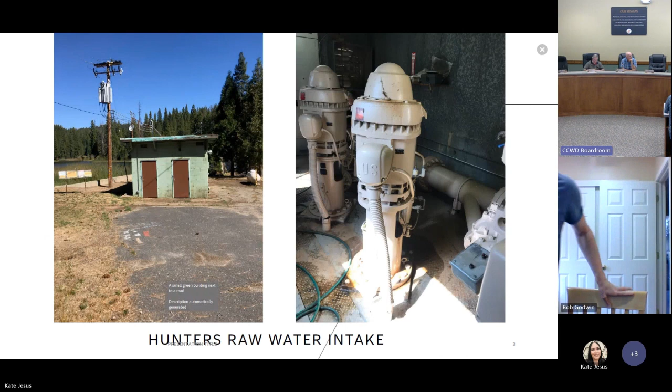So the Hunters raw water - on the left there, that's the old chlorination building. That's going to be the new location of all the electrical and controls currently at the bottom of the dam, so in winter weather conditions and stuff we need to get to them. They'll be right there at the top of the reservoir.

Did they have any trouble with that bear? With the bear - there's a big bear out there that was tearing apart that apple tree. Oh, wow.

And on the right, those are the really old pumps we have at the bottom of the reservoir now, so they're going to be replaced with some modern, larger pumps that can handle it when the water level in the reservoir drops.

We've gone through a bunch of environmental review right now with the Forest Service, so they've been pretty difficult to deal with lately on the RFIs, even though we're not on Forest Service property. But we've been working hard to. There's spotted owls, I guess, in the area now that weren't there a couple of years ago, so we're dealing with that.

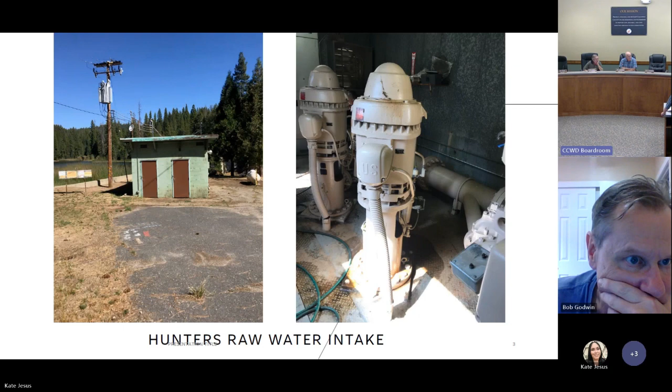Next slide. So this is the Arnold wastewater treatment plant. This plant project's 100% designed right now, which actually was going to go out to bid until the sewer customers in Arnold are now under disadvantaged community. So we got options to apply for SRF grants on that project. We're working on an application right now. HydroScience, our design engineers, is working on a design memo to submit along with environmental documents that are now going to be required as part of the grant application.

What, how will that affect the timing? Well, this is a CIP loan project. Initially, the money came from the first loan that we got a couple years ago. It should take at least 6 months to do the environmental portion of the project. So would it be applying for the loan and grants during that timeframe? Yeah, we're working on it right now. They were supposed to be working on a letter report to us for their increased scope, and they're also working with, I think it's either Helix or Dewberry, on the environmental to try to get them lined out.

Because right now it was going to be pretty much an exempt project because we were going to fund it ourselves, and now we have to go through a full environmental review if we go out and seek a loan or a grant. Yeah, well, this would be 100% grant we're looking for, so it's definitely worthwhile to go after. Worth doing. So basically, the job is to put a second clarifier there and new digesters.

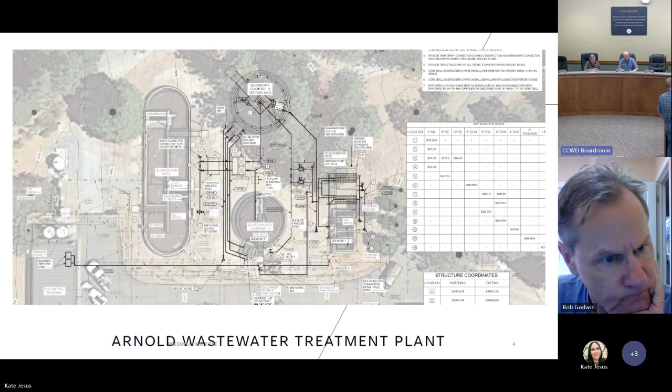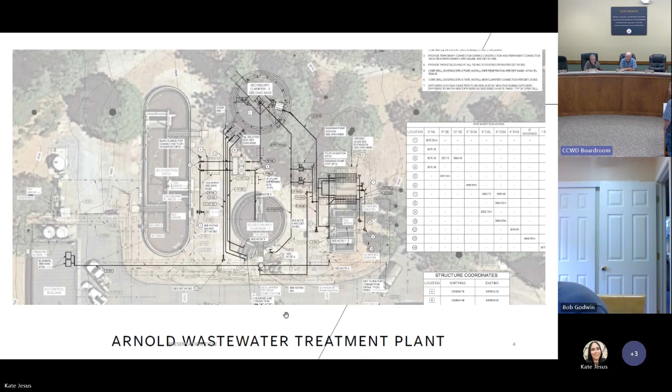Okay, the next one. Yeah, I mean, the grant will slow this down. It has already slowed this down a little bit. Kudos to our operators for being innovative and doing some modifications on their own in the meantime, because we were hoping to have this already out to bid and starting construction in the next construction season. That's probably going to hold it a year. But the possibility of a grant is worth the wait, I think.

Is there any part of this proposed work that's going to affect the tribes? Yes, it potentially could, so we have to notify them.

Jenny Lind Tank A-B transmission pipeline, working on getting the bid documents out this month for that project. So it's a new transmission main, and I think it's 4 PRV stations along the way for the pressure. So, yeah, that's the elevation, that's the profile there.

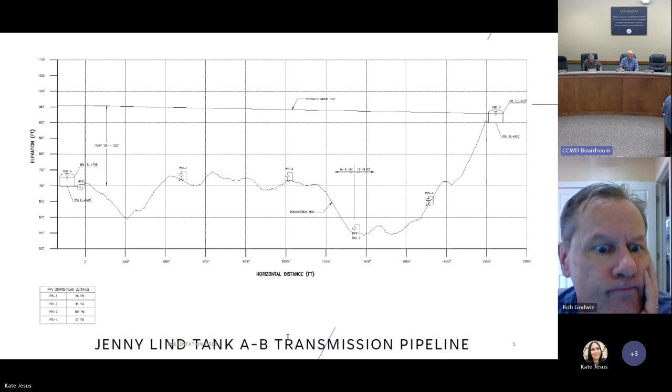Yeah, and next slide. So this is the La Contenta wastewater treatment plant. We got some budget this fiscal year to start doing the design on this project. So we had a meeting between operations and engineering and brought our treatment plant operators into the picture to talk about the project. Bob Godwin, our retired engineer, knew it well, he was very involved in this project during the master plan process, so we brought him in to help us develop the RFP for this project.

He's online if he maybe wants to answer some questions, but basically the project we're looking at is a second BioLac, which is the aeration activated sludge unit. It's that second picture down from the top there. It's an old style BioLac, so it's not as good as the new ones they're coming out with, because the new ones have integrated clarifiers and nutrient removal and a lot of the things we really need at that plant.

So with the project we're looking at, they have a lot of flow equalization problems with Huckleberry. There's a lot of flow that comes in, and they can't take it all at once, especially during the big rainstorms. So if we have a second BioLac unit next to the existing one, we can eventually double the capacity of that plant, and also have redundancy in the meantime until build out. By building 2 of them, you can easily maintain them. There's also some other improvements that have to be made to the effluent disposal there eventually as the capacity increases.

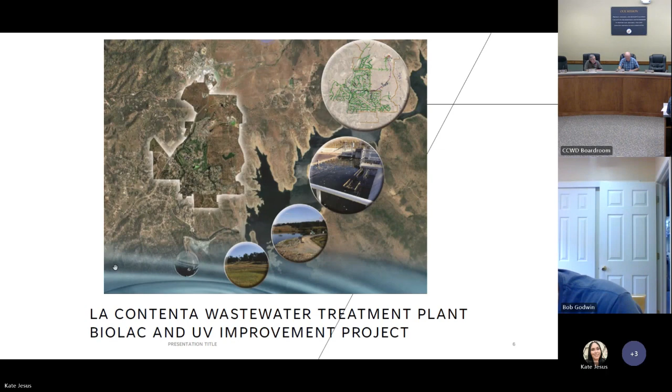Okay, next slide. This is the Jenny Lind water treatment Clearwell number 2. This one's on the CIP for basically repair and repainting.

During the site visits, there's some holes in the top of the roof on the existing Clearwell, and the conditions are at a point where the operators won't even walk on top of it. So the project scope might have to be increased from just paint and repair to a roof replacement.

When we did the original Clearwell, Clearwell number 1, about 10 years ago, they raised the elevation of the Clearwell. These Clearwells float together, so with this new Clearwell we don't have enough freeboard between the rafters and the water level. We really do need to raise the roof, because there's a sloshing effect that can happen during an earthquake and can damage the roof.

It's also a standard in the AWWA design standard that you're supposed to comply with. So we're looking at how much free space they require - you need about 18 inches for this diameter tank, and you've got about 6 right now.

One option we looked at is if you take the rafters out, you can put an aluminum dome like we do on the Redwood tanks replacement project that sits on top of the walls, and you gain the freeboard because you don't have the rafter depth. That's one option. On the other Clearwell that we already rehabbed in the past, we put like an 18-inch circuit, just a piece of new tank wall, and then raised the rafters up.

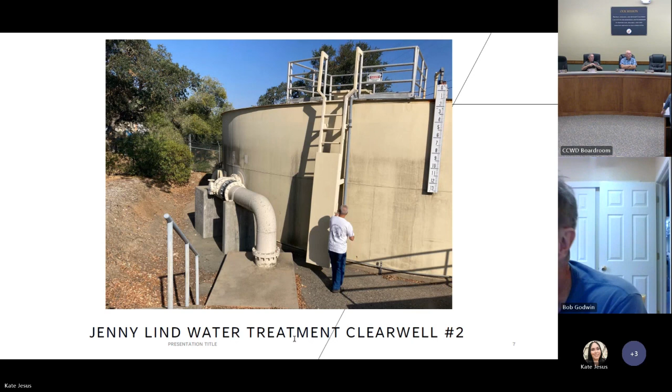So that one, we'll have to talk about the scope here when we get closer to the final design.

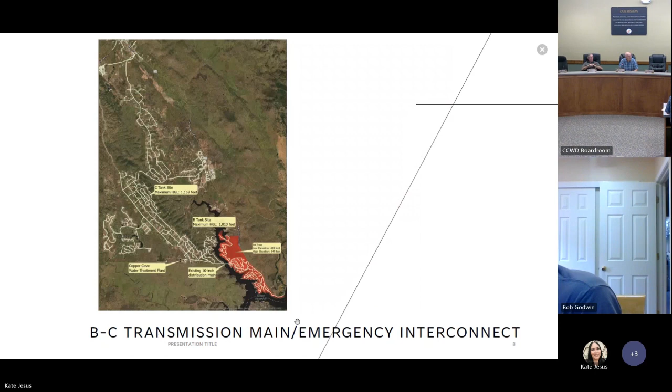Next one is the B-C transmission pipeline. PBI is working on this project, and we just got the 50% design for the transmission main. So the new transmission main is going to follow, it's going to be west of Little John.

Their kind of cross-country line goes down. There's a little section there at Copper Valley, Saddle Creek that was put in originally, so we'll tie into that section. And then there'll be a little section that's already built, and then we go up to the B tank, or C tank, sorry.

So this is going to reverse the flow from right now. We go from the treatment plant up to B tank, and then we pump to C tank. But the C tank elevation is higher than the B tank, so if you reverse the flow, it'll flow by gravity back to B tank.

They're also working on the emergency interconnect. Right now we've got that 10-inch line - I'm not as familiar with this project, but there's a 10-inch line that goes underneath Lake Tulloch there that we don't know the condition of, that supplies all of Poker Flat. So this emergency interconnect would supply water to that area there in red if that line were to fail.

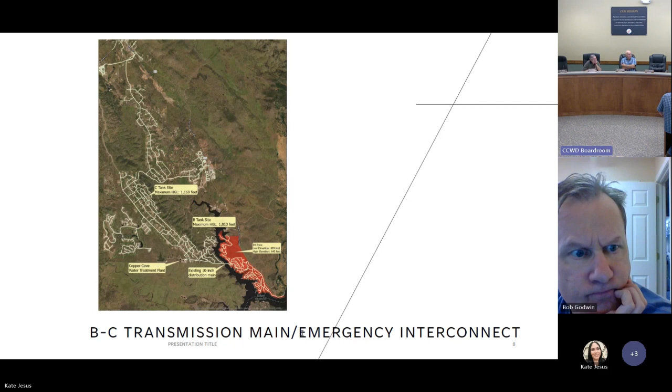Now I'll talk about the ones in construction right now. We've got the West Point, Wilseyville consolidation, West Point water treatment plant, the Copper Cove lift station, AMI, Redwood tanks, Forest Meadows, Copper Cove tanks, and maintenance building - just about done.

This is the West Point, Wilseyville consolidation - that's the sludge drying area, beds. KW Emerson's is working on this project. They've had some struggles with delays and stuff, but it looks like they're still going to be able to meet the deadline that we have with our funding agency. That's the big push on this project.

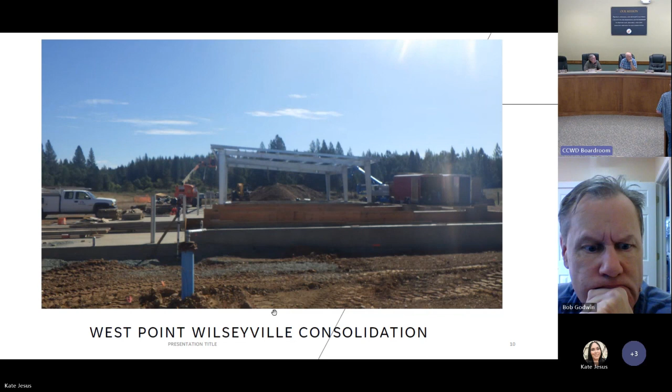We've got another picture, the next slide, of the West Point - this is sludge lagoons, and that's a wet well in that picture there. They've got some pretty massive excavations, some pretty good sized equipment out there.

Kevin, there's a prior slide there that you said was a lagoon - will that be lined? Yes. Okay.

Did I miss this sheet here or something? It might have been the slide before this. You're talking about the drying beds? Oh, okay.

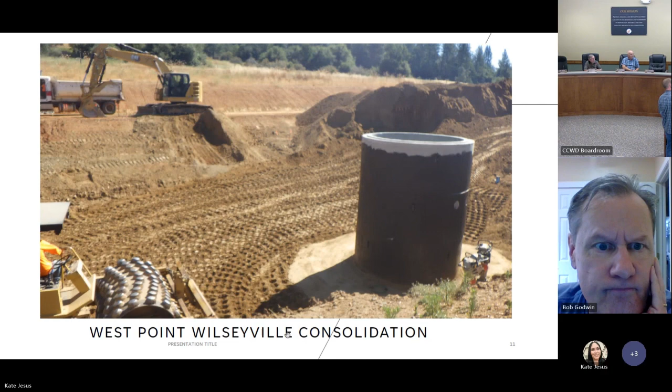You don't want to do groundwater recharge up there? They have some removable panels, the ones that pop out. If the groundwater pressure gets too high, they actually pop out, and as the groundwater goes down, they settle back down.

So this is the West Point water treatment plant. This is another one that PBI is helping us on. It's a new metal building with a new filter inside, and it has all these special fabricated pipes they had to make as part of the project. It's been a pretty good project, I think they're just about done, maybe by the end of the year.

Yeah, it's a segmented elbow. Cool steel pipe.

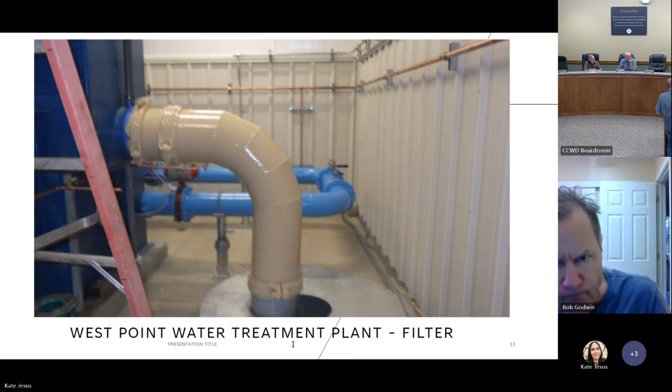Next slide please. I don't know how these got out of order, but we have the Copper Cove lift station project. This is lift station number 15 on Lakeshore Drive. So this is them loading those polymer wet wells into the middle of the intersection, or middle of the cul-de-sac.

All right, next one. Is that our train, Jeff? No, no, but we could put in a budget request if you'd like.

Could you go back to that one real quick? Kevin, is that a similar depth as the one we were looking at the other day? No, this one's a lot shallower, I think this one's only like 12 to 15 feet. The ones at Poker Flat are a lot deeper, twice as deep.

And they're in solid rock there, so they actually came in and drilled - it's like the same machine they use for drilling and blasting, they drill the holes in the ground, but drilled it in a really tight formation. They actually hit one of our lines because we mismarked it. They drill that and then they can break it up with a hammer a lot easier.

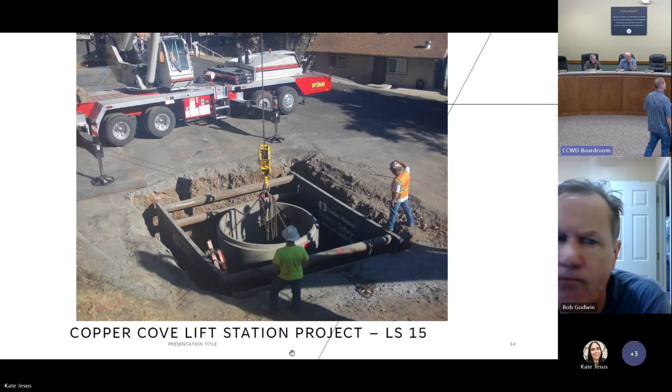So this is the same location as we showed in the last one, but this is the retaining wall we built. To make room for the generator and the MCC, we had to take part of that hillside down and build a retaining wall there. There were some design changes here that I think helped both of us and the contractor, because there were some problems with our design, but the contractor was able to make something that worked well for them also.

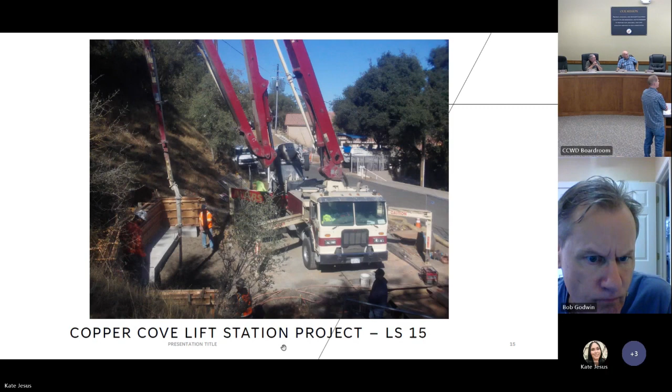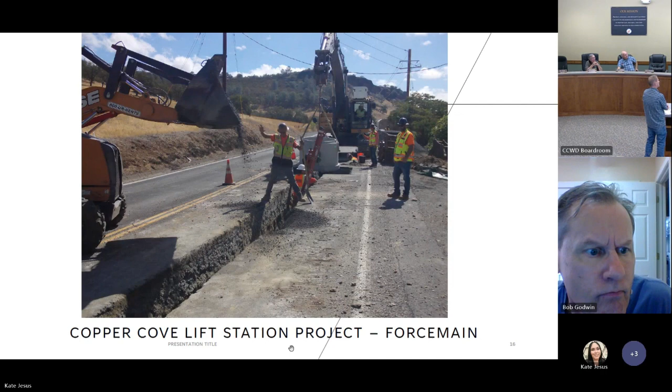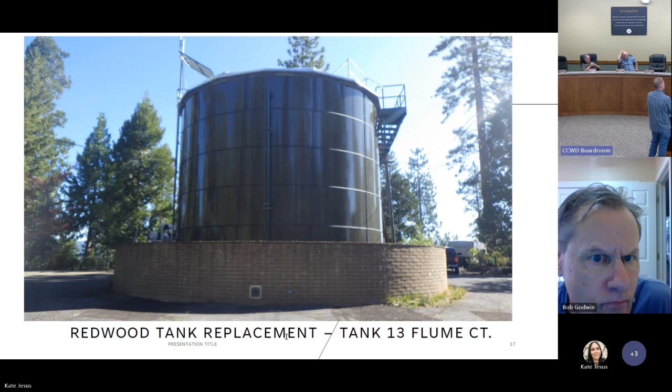Next one. So this is our redwood tank, this is the Flume Court. This is the one we had to build inside an existing wall, which made it kind of challenging, but it came out real good.

Another one, Big Trees 8, up at the top of the hill. Is that that dark color? What's the purpose of that?

So the tank comes in two colors, you get either blue or forest green, same price, so you go with either. Some of our old tanks, like the metal ones, are blue. All the new ones we got the green. They only come in two standard colors, though you can get custom colors, but they're more expensive.

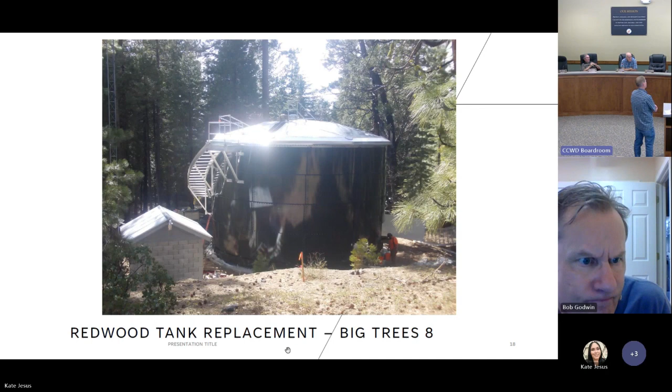Kevin, these are all fully tied in and operational now, right? Yeah, this has been tied in. This was the last one to be done, tied in a couple months ago. This was the tank.

Yeah, so this one was well overdue. I think we have a final completion coming up on this, right? Yeah, we're trying to close out the grant.

We actually had a really productive meeting yesterday with Cal OES on the funding. Somehow our calculation went in our favor and we can actually charge up to $17 million more on this project, but obviously we only got $1 million more cost, so.

Yeah, so we got, well, at least put a logo on it or something. Get some of the custom paint job.

We do have another redwood tank out there still, right? Yeah, Timber Trails, that one's a little more challenging with the NEPA review because it's on Forest Service property, so that would probably slow that process down a bit. But it's nice to know that grant funding capacity is out there. Maybe we do take that on. Yeah, we should if there's another hazard.

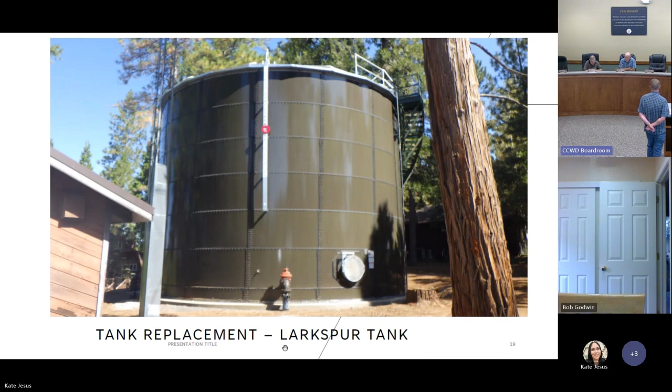Also include the example of what happened on the Patterson fire in Rancho. We had 2 tanks burned down, and then we had to shut the water off on that. It's important people know that we've been working on this, this isn't recent stuff. We've been thinking about it and doing it for a long time, so it takes a long time to bring these grants to fruition. But good work, though.

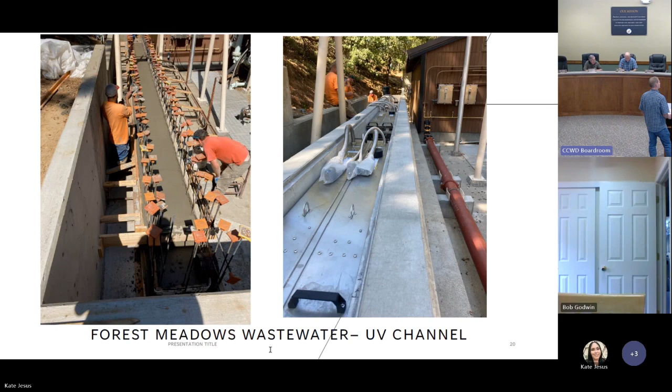But yeah, so there's quite a bit of grading that needs to happen there for that tank.

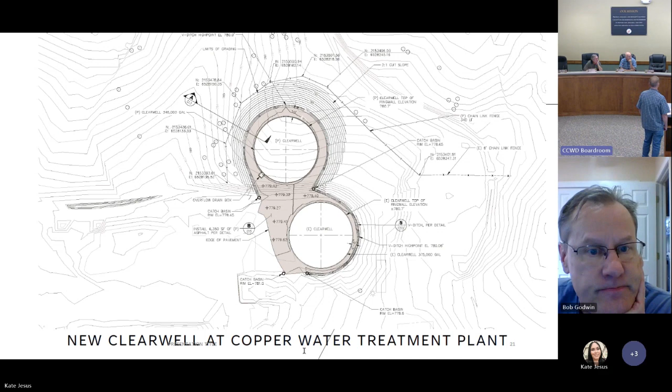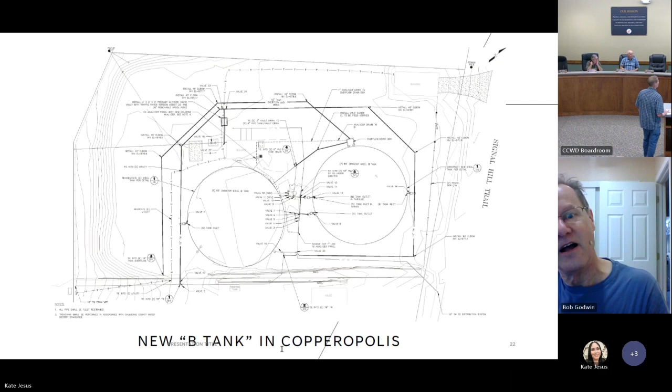And then we're also, PBI is also working on it. So a lot of this piping here works well with that B2C transmission main project. It's got a lot of new piping. Well, actually, this is not the B2C, but this is for the next phase of it.

And then water resources, the departments have kind of merged here recently. So Parks is kind of in charge of the water resource department now. So we participated in some of the FERC and DSOD dam inspections over the last month or so. And then our department's going to start jumping in on this FERC licensing.

How many dam inspections do we have to do, and how often? So they're yearly. We went up, we actually jumped in because they were doing the same time at Utica and Union. So then we went to Alpine, Spicer, McKay's. You can, if you want, go to the next slide, get some pictures too.

So there's McKay's and Spicer, the hydroelectric, and Spicer bypassing it. I don't know the exact reason why they bypassed it. PG&E had a distribution line down, and there's nothing wrong with the powerhouse, but PG&E was not allowing them to interconnect. I talked to Jake last week, and the powerhouse had been down for 20 days already, and they were anticipating maybe another month at the cost of $10,000 a day in lost revenue.

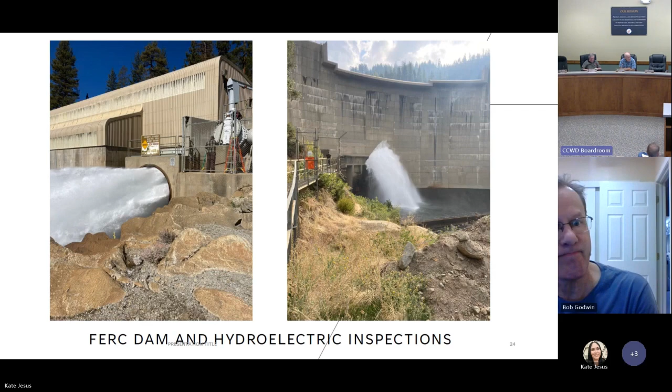That's it, that's good. Do you have any questions? No, I just remember the discussion about how critical the tolerances were on that UV channel installation. Oh, yeah.

Cole's company came through for you again? Yeah, they did an awesome job.

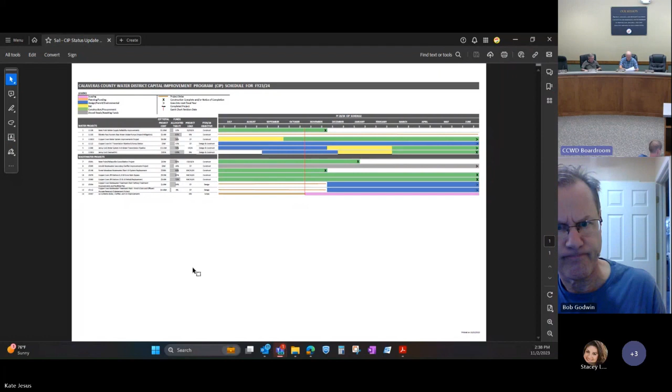Hard to see, but on the water projects, we're getting ready to close out the West Point water supply reliability improvements. That should be closing out towards the end of November, early December, so we'll be taking that to full board for officially closing the project out. And then on the wastewater project, likewise with West Point, the Wilseyville consolidation project looks like a mid-January closeout.

And then another closeout happening short term would be the Redwood tank, so we're kind of finalizing that. And then we've got a number of other projects closing out towards the end of the fiscal year, but we'll be updating that later as it happens.

It wouldn't be a bad idea to have something we can read. Exactly, and I want to use this Gantt chart to publish out to the public to show them how we're working on several projects and closing them out as they're being completed. I think larger text would help, something that's legible, something I can actually see. Yeah, it's kind of, we try to fit as much as we can in one fiscal year and it shows. All right, do you have any questions?

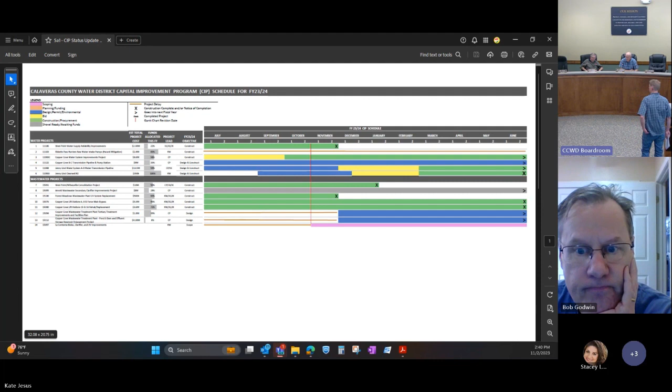I want to, then probably the next board meeting for West Point, or January for West Point. Okay.

So it's nice to be able to knock some off the list. And the money's holding out. The money's there to close them out, supposedly.

Have we had anything come into bid here lately? Copper Cove Water came in a little bit under our engineer's estimate. Seemed like we had another one too - that's the most recent big one.

We're hoping Jenny Lind A and B will be out to bid by the end of this month. And how long is that? Three months.

And then maybe some smaller purchases or contracts - curious if there's any trend one way or another. I'm getting on the 10th a 5.5% increase in steel. I think they might have lowered it 5.5 early in the year, but now it's going back up 5.5. For this fiscal year, it's 7.3% for the entire year. Hopefully that's the start of a trend, but remains to be seen.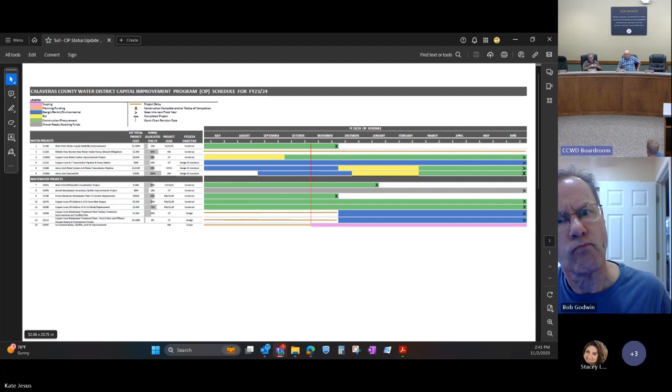Okay, any other updates? Anybody?

Good afternoon again.

We've had several interactions with the group at CV Development Partners Group, Mike Fletcher and Tom Hicks. Had meetings with operations staff and engineering staff to talk about several projects they have going on out there. They have what they're calling Building 11 and 12, and also the Promenade at Miners Camp, which is an outdoor plaza area right in front of Building 11 and 12.

They're going to eliminate one of our streets, so we've been talking about some of the impacts to the sewer operations of our sewer system in that area - talking about maybe moving some manholes around and restructuring the sewer system a little bit to facilitate their project.

Are you designing that? They are going to be designing it - we've had the field meeting, talked about the modifications, and then we asked their engineer, Tom Platts, to provide a site plan showing those modifications.